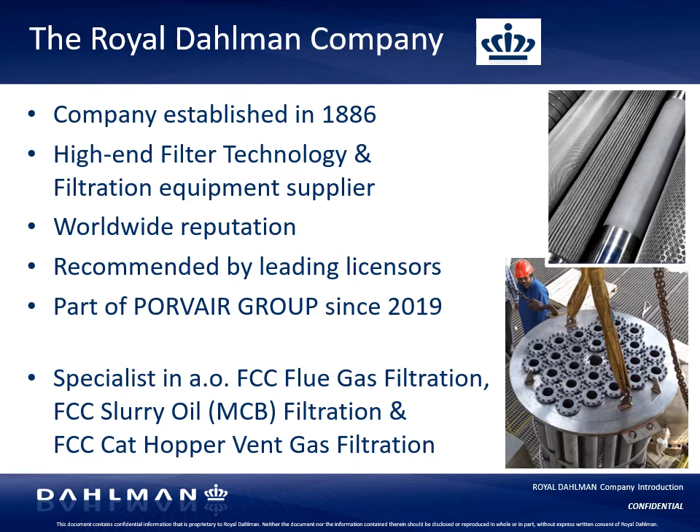This is great, because now in our FCC filtration systems we can implement our own in-house developed, tested and manufactured sintered metal filter media. In the refining industry, Dahlman has a serious track record in FCC filtration solutions, such as FCC cat hopper vent gas filtration, slurry oil filtration, and FCC flue gas filtration, the topic of this presentation today.

Of course, everyone is aware that our environment is important to all of us. Reduction of NOx, SOx and particulates in refineries has always been an important issue, but the regulations nowadays get more and more stringent. So many refiners worldwide need to revamp their FCC regenerator off-gas systems, and even new refineries need to implement the best available technology to seriously reduce their stack emissions.

So for the removal of catalyst fines from FCC flue gas, filtration can be a great solution in situations where conventional separation technology is not sufficient anymore to meet these stricter emission guidelines.

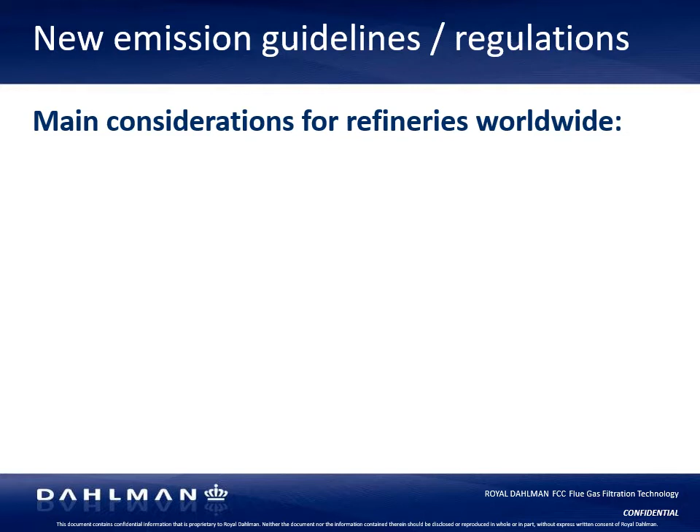When it comes to catalyst fine stack emissions in refineries, many countries require these to be lower than 50 milligrams per normal cube, or even lower, sometimes down to below 10 milligrams per normal cube. Therefore it's good to know which solutions are available and proven, what are the requirements they shall comply with, and which technology is safe and reliable to operate.

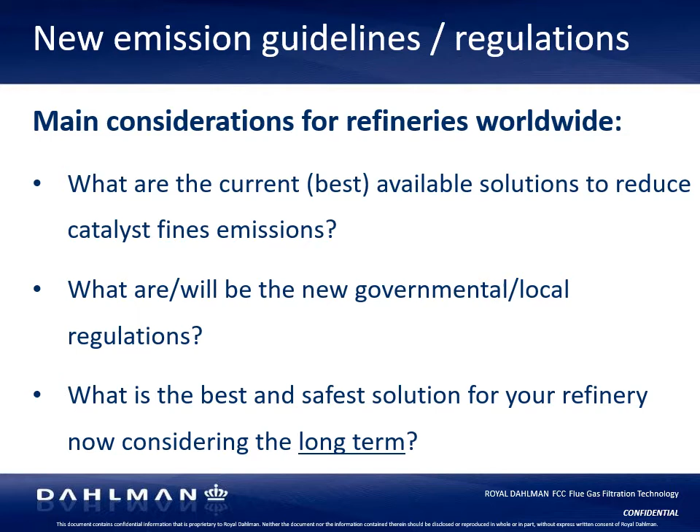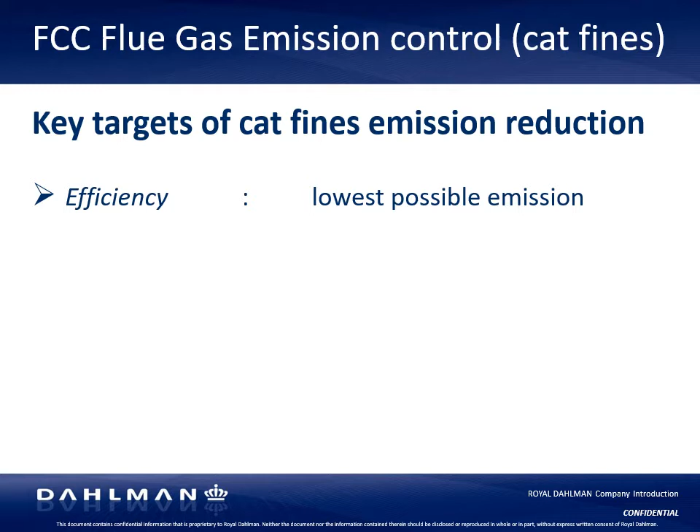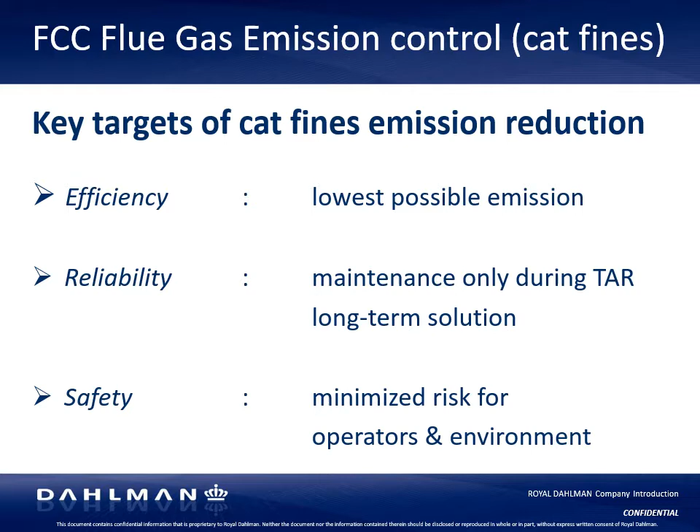So the key targets for cat fines emission reduction are efficiency. It makes sense to install the best available technology, because in the near future the environmental regulations will only get more stringent. Obviously you wish to install a reliable system with low maintenance, long operational lifetime, and finally it shall be safe for personnel and environment.

This picture shows a typical FCC flue gas process flow diagram, showing the reactor and the regenerator on the left side, and the possible separation and filtration solutions that can be installed to clean FCC flue gas before it finally leaves the stack. I will go through the different options that can be considered in order to remove catalyst fines from the FCC flue gas.

First, it is good to know that the typical concentration of cat fines in FCC flue gas is about 200 to 400 milligrams per normal cubic meters during normal operation. However, during upset conditions, this can increase up to 10 times higher than during normal operation. So it's very important to know, especially when designing separation and filtration equipment.

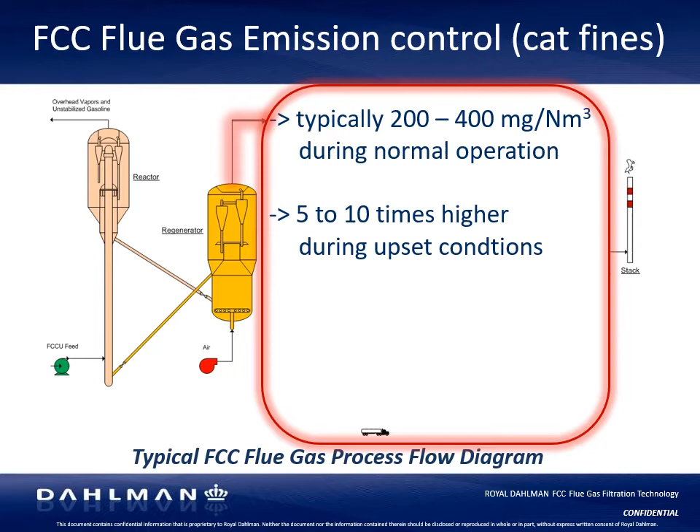One of the oldest separation technologies used in refineries to remove catalyst fines is the third stage separator, or TSS. Before the flue gas leaves the stack, many FCC plants have a flue gas expander or power recovery unit to recover energy from the reducing flue gas pressure. Typically, regenerators are designed with multi-stage cyclones to capture and return and drain catalyst back to the fluidized bed.

However, this flue gas still contains high contents of catalyst fines that can do harm to the expander. So a third separator installed upstream of this expander can protect the expander blades from erosion due to abrasive catalyst. The third separator contains cyclonic separation technology, so multiple cyclones, reducing the high amount of cat fines in the regenerator off gas significantly. In order to optimize the efficiency of the TSS, a certain underflow needs to be extracted at the bottom of the vessel.

So when 100% of the flue gas is coming into the TSS, 97% is leaving the TSS, going to the power recovery unit, and average 3% of the gas is going to the FSS, the fourth stage separator. The volumetric flow rate of the underflow gas is determined by means of the critical flow nozzle.

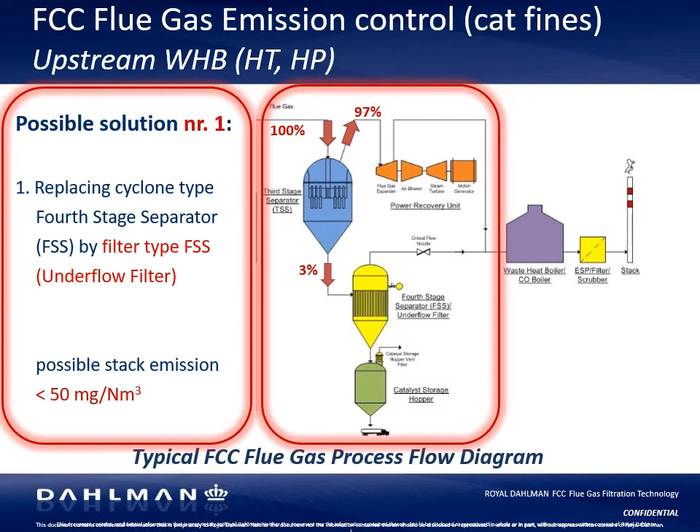The main problem is that the efficiency of a cyclone is rather low, and a lot of fines will end up in the flue gas again, resulting in high stack emissions. A possible solution for refineries already having a TSS system with a cyclonic type FSS is replacing the underflow cyclone with a fourth stage filter, because a filter has a much higher efficiency.

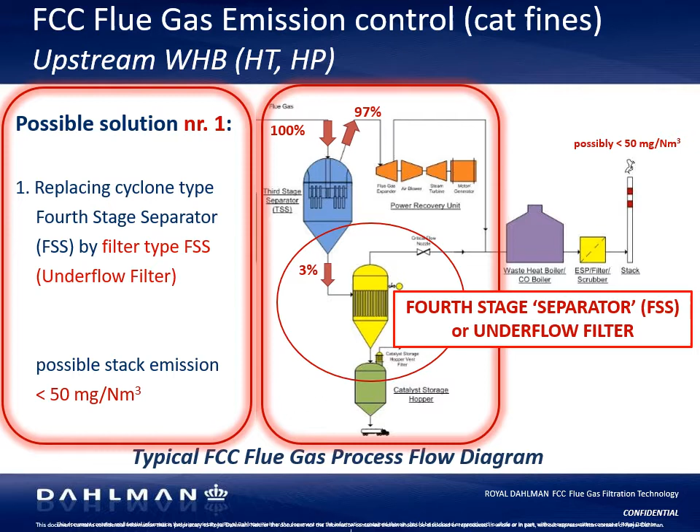The purpose of the fourth filter is to effectively remove most of the catalyst fines from the underflow gas, and in this way assist the third separator to reduce the overall stack emission.

In general, refineries having a TSS package with an FSS cyclone report fines emissions in the stack that are not lower than 60 milligrams per normal cubic meter, many actually much higher, and where a new FSS filter can reduce this to below 50 milligrams per normal cubic meter, which currently in many countries is still an acceptable level.

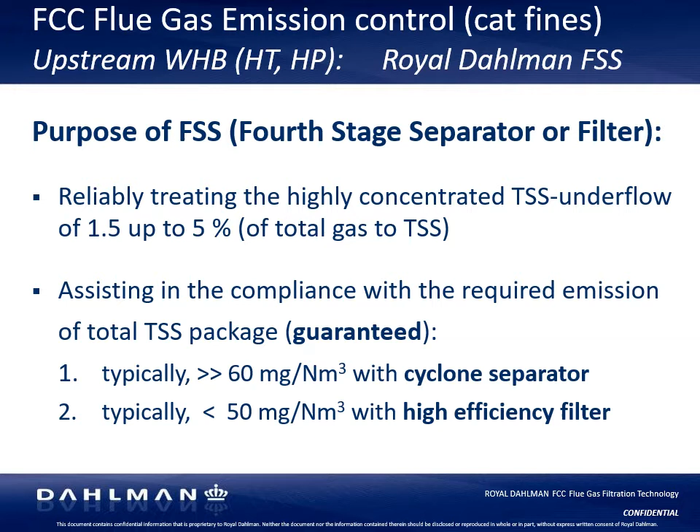Since the fourth separator filter is operated at a pressure of typically 2 to 3 bar G and at high temperatures up to 500 to 600 degrees C, there are of course some critical design criteria.

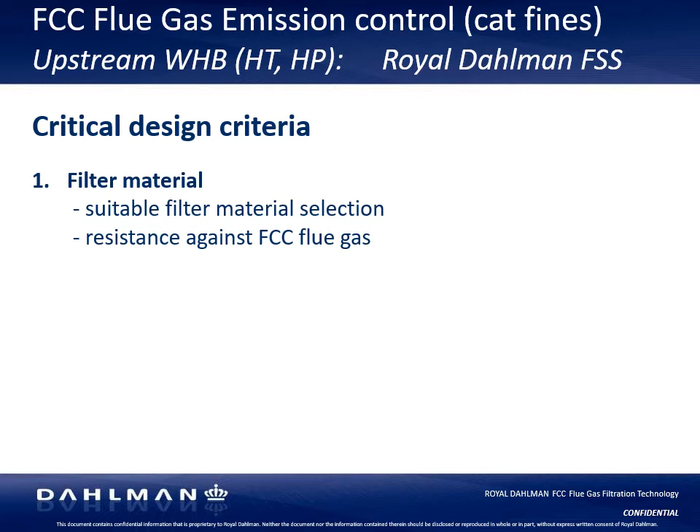First of all, the filter media shall be resistant against high temperature, and they shall be suitable to operate in the very corrosive, oxidative and dust-laden environment.

Secondly, the design of the filter is very important. Due to the high solids load, the filter elements shall be optimally protected against the abrasive characteristics of the catalyst.

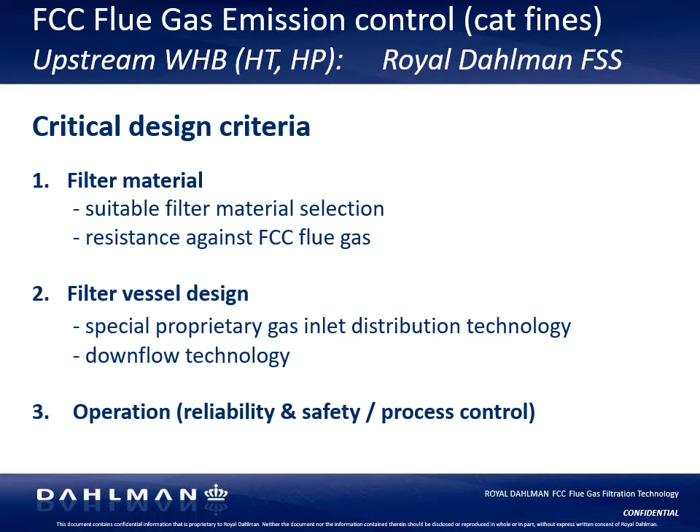Finally, the operation procedure and controls shall make sure that the filter can be operated without unplanned stops for at least one turnaround period.

Dahlman has supplied multiple fourth separator filter systems which are successfully in operation for a long time. One of the reasons for that is that we apply sintered metal fiber filter media in order to achieve surface filtration and to prevent clogging, so no penetration of particles inside the filter medium.

They also show perfect in-situ cleaning performance at low pressure drop. And although they are exposed to challenging process conditions, they have excellent lifetimes, even up to nearly 10 years.

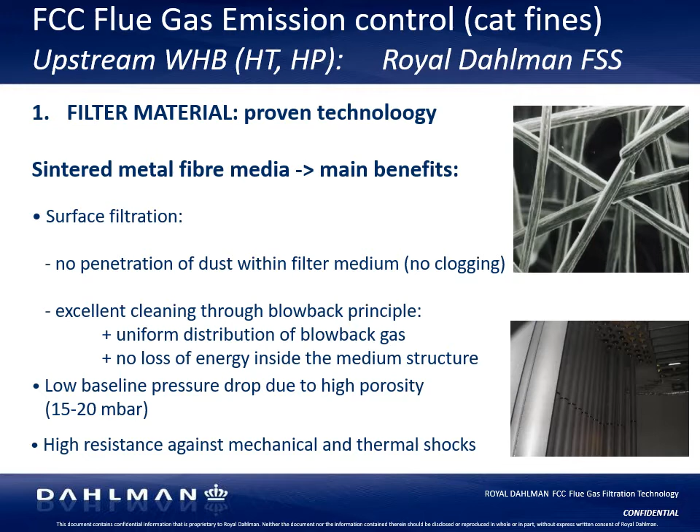Dahlman has developed a very successful inlet device that prevents the filter media from direct impact of the abrasive catalyst fines. Since the filter elements are automatically regenerated during operation, it is critical to achieve low velocities inside the filter housing to make sure that the fine catalyst particles fall down into the cone of the filter after cleaning.

Too high velocities, of course, will result in re-entrainment of fines back onto the filter elements, which will result in high differential pressure and in the end, plugging of the filter.

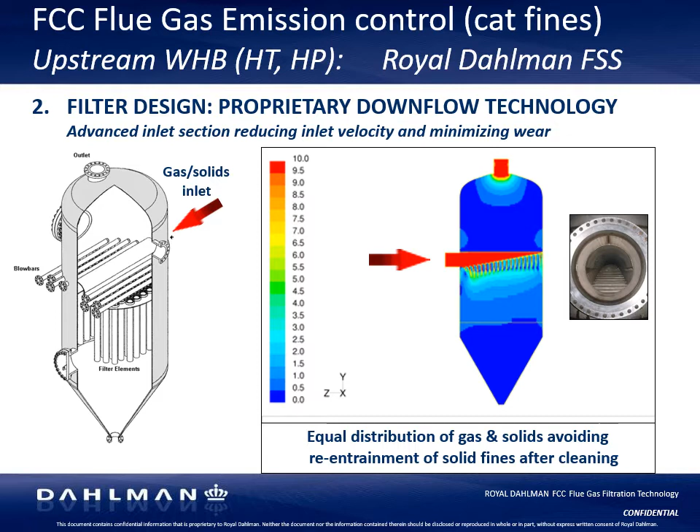Finally, as mentioned before, the filter shall be designed to function properly even during the worst case scenario, so during upset conditions. During startup and shutdown, the temperature control is also very important to prevent condensation, and the operation of the filter package as a part of the overall flue gas cleaning system shall be safe and reliable.

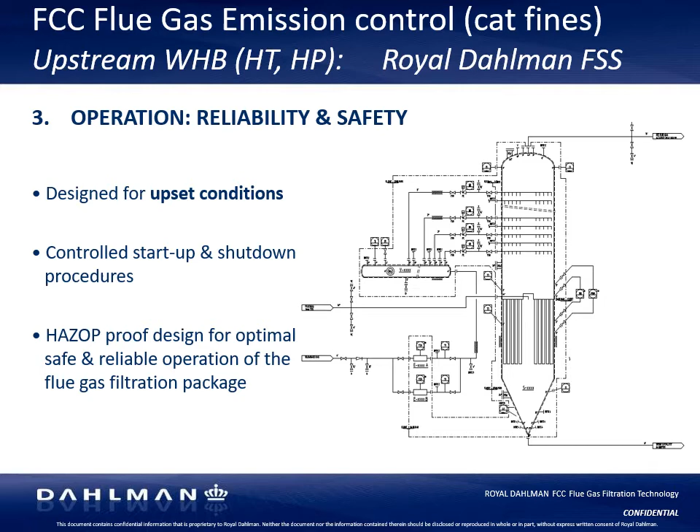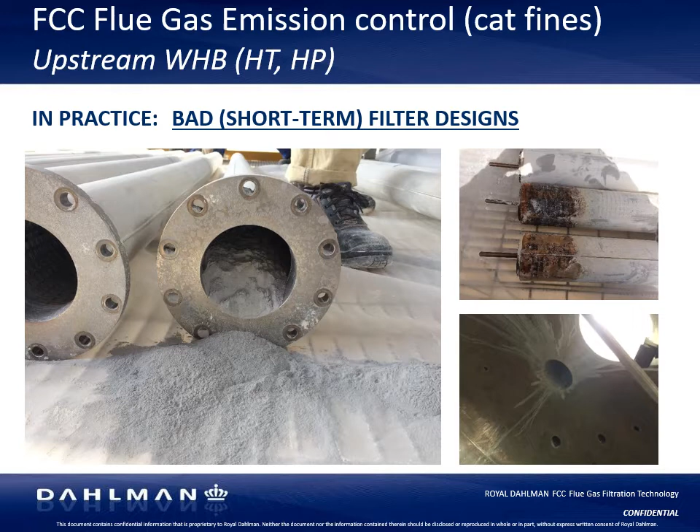However, when all critical design criteria are taken well into consideration, it is very well possible to operate the system very reliably and achieve lifetimes of the filter elements up to nearly 10 years.

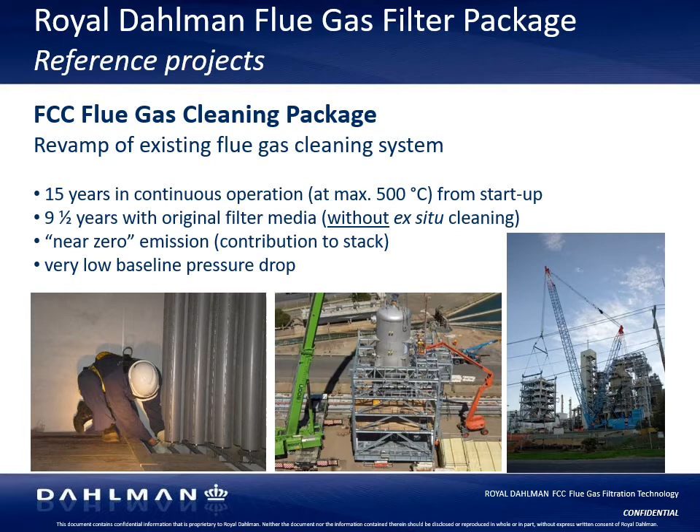Another possible solution that can be installed upstream of the waste heat boiler is a full flow filter that replaces the TSS and the fourth stage separator, so in fact it is handling 100% of the FCC flue gas. The filtration technology that can be used in this location is similar to the fourth stage separator, so typically sintered metal filter media, and obviously this will result also in a very high emission reduction.

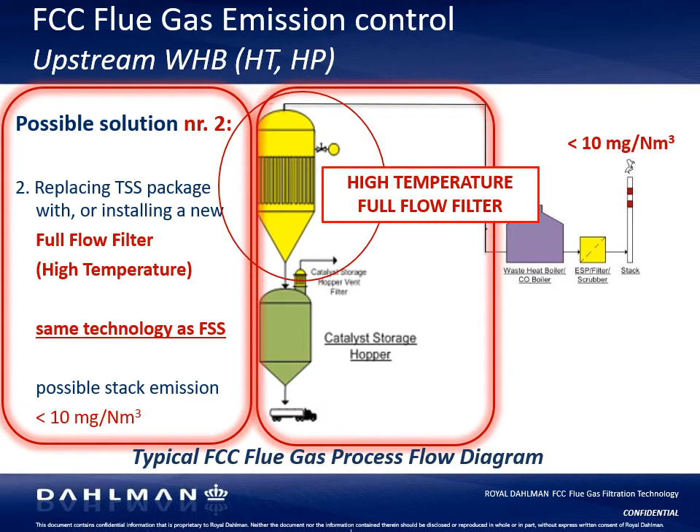The main issue here is that due to the high temperature, the high pressure and the high actual gas flow, this option is extremely expensive. And when it shall replace the existing equipment, often also the large plot space that is required is problematic. So yes, some high temperature full flow filters are in operation in the field currently, but really only in very small refineries.

Other flue gas cleaning solutions are installed downstream the waste heat boiler or the CO boiler, as you can see here on the right.

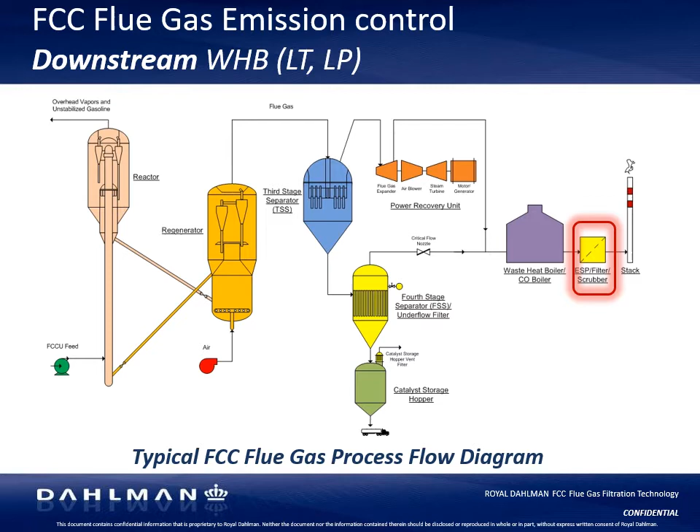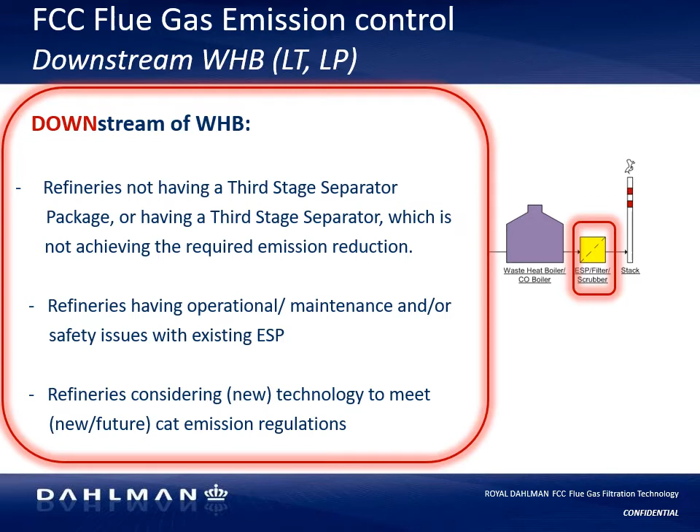These options are usually considered in refineries that do not have a TSS, or have a TSS that just cannot achieve the required emission level anymore. Some refineries also consider other technologies because they have safety issues, mostly with ESPs that operate at high current and high voltage, or they just need to comply with new, more stringent governmental regulations.

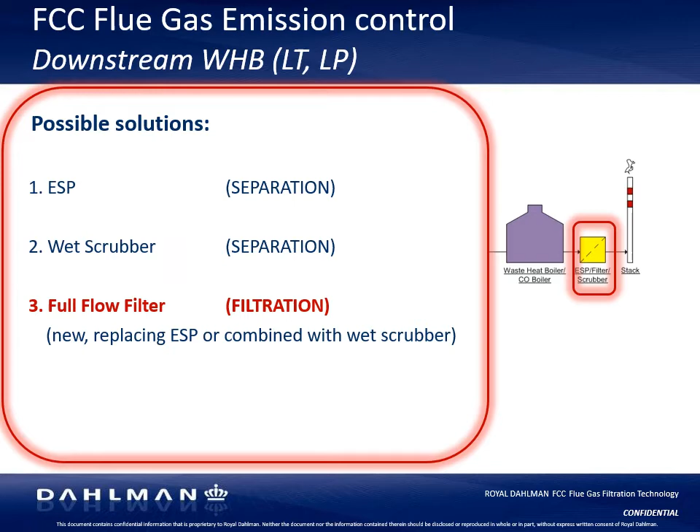In general, there are 3 technologies that can be installed at this location, downstream the waste heat boiler: the ESP, which uses separation technology to effectively remove catalyst fines; the wet scrubber, typically not installed for fines removal but for SOx reduction, however the water will catch fines too; and the full flow filter that can achieve a very high efficiency when it comes to solids reduction.

When comparing all these different technologies, there are some important differences that I wish to highlight. I won't go through them all. For instance, both the full flow filter options are very efficient, but there's a big difference in investment costs. The filter installed behind the boiler is much cheaper and also less risky due to the lower operating temperature and pressure.

Apart from that, the guaranteed emission of a full flow filter is the lowest of all. Even 10 milligrams per normal cube may be well below the required emission level, but for sure it is future-proof since emission regulations will only go down.

Another benefit of a filter compared to a separator like an ESP is that it is not sensitive to solid load fluctuations. And last but not least, ESPs may cause a safety issue.

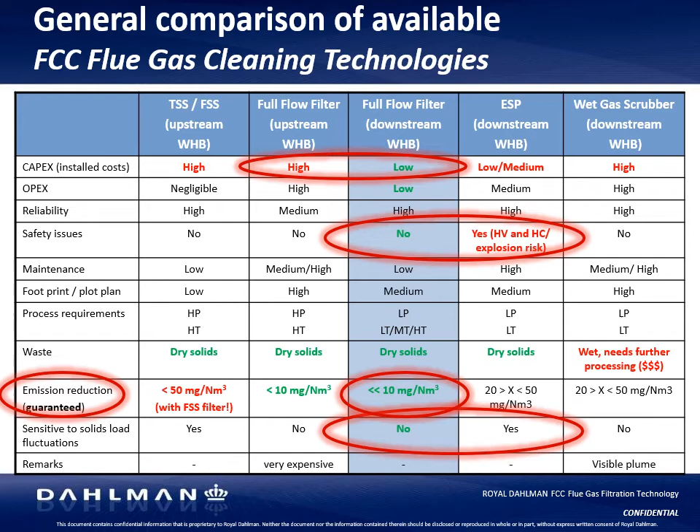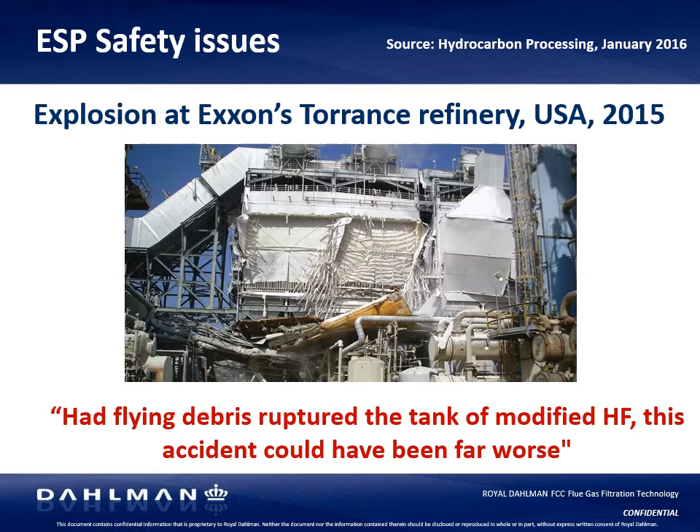Due to the benefits of the full flow filter installed behind the boiler, I will use a reference project installed in one of the European refineries to give more details. This refiner had an old boiler and an ESP that was bypassed for years due to malfunctioning, so there was actually a big yellow-orange plume coming out of the stack.

The new system should make sure that the emission is reduced to below 30 milligrams per normal cube for now, but also should be able to meet below 10 milligrams per normal cube to be prepared for the future, as I mentioned before, but without a lot of modifications to the system I wanted to install now.

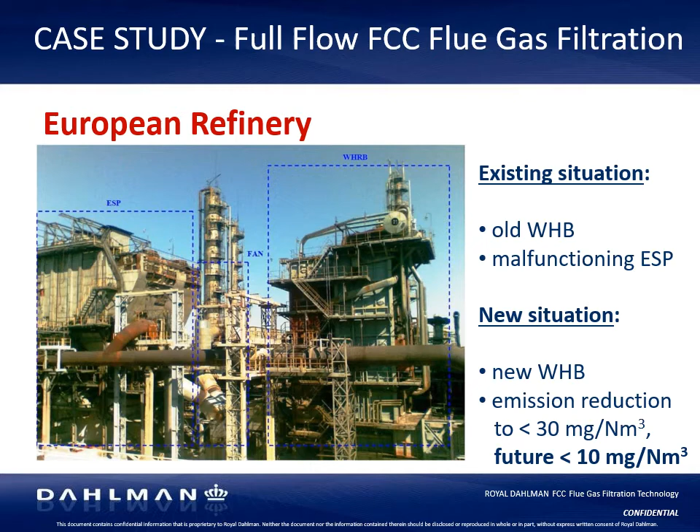For this customer, the choice was a new and better ESP or a full flow filter. There was no need for SOx reduction, so a wet scrubber was no option for them.

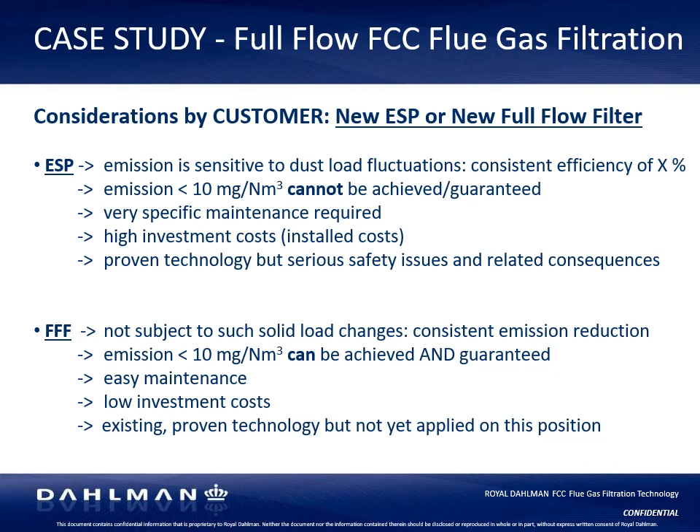This is actually a summary of the main considerations they made when comparing both technologies. I already mentioned some of them, but actually the installed costs of the ESP and the guaranteed efficiency of the filter were the key drivers for the refiner to install a full flow filter.

A filter system installed at this location shall at least comply with the following conditions. Of course, the filter media shall be suitable for operation in an FCC flue gas environment. The operation shall be well above the acid dew point at all times to prevent condensation issues, and an optimal inlet gas distribution system is required.

In this specific project, also the low guaranteed emission level was an important key driver for the customer to decide to install a filter.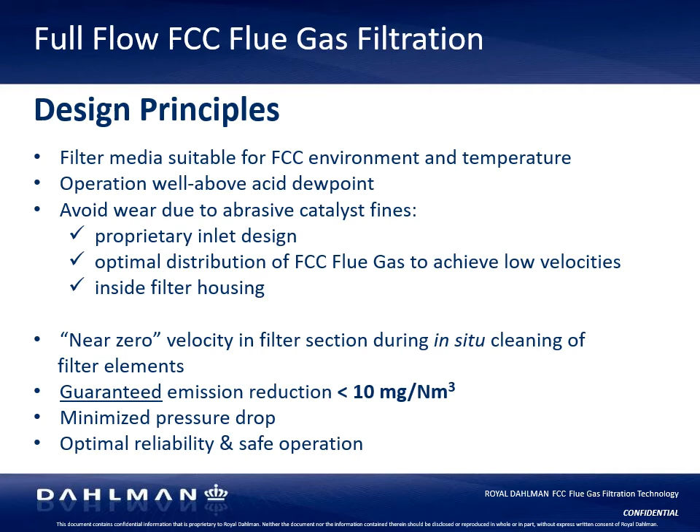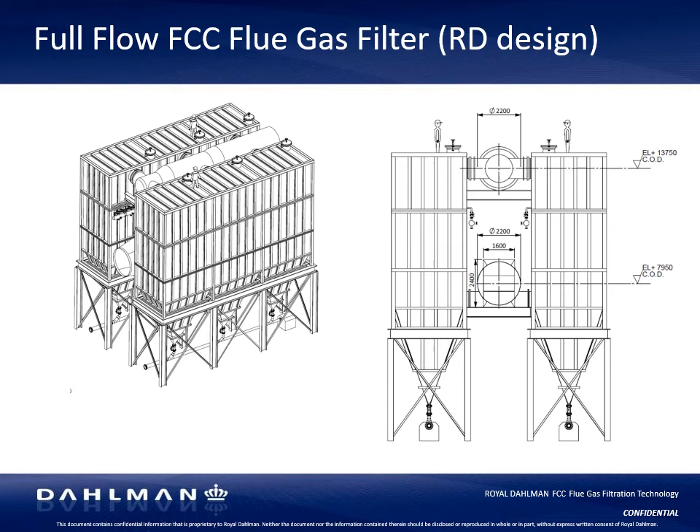Here you can see the general layout of the full flow filter system. Actually, it's split into two main parts, one on each side of the inlet and outlet ducts. The inlet duct is here, and the outlet duct is just above the inlet ducting to save space.

As you can see on the picture of the inlet header, it's a special inlet distribution device that has been developed specifically for this application to make sure that the catalyst fines are pre-separated and that the gas is equally distributed inside the filter compartments.

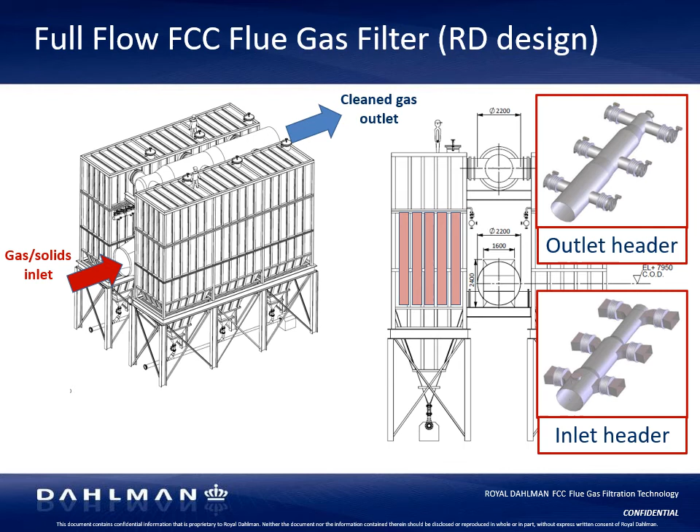Both compartments contain filter bags. They are fabricated of a unique filter material developed specifically for FCC flue gas filtration.

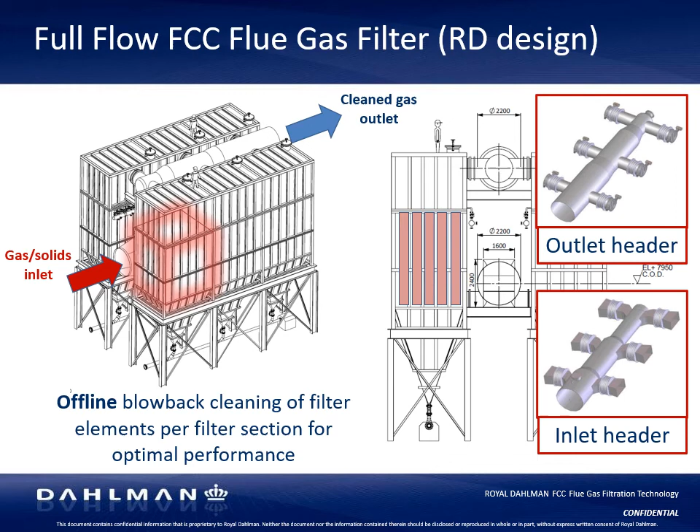One of the key features of this filter system is that individual sections can be offline cleaned. So the flow rate in one section can be blocked, while the other sections continue the filtration process. In this way, the very fine catalyst particles can optimally settle down in the bottom section of the filter after regeneration.

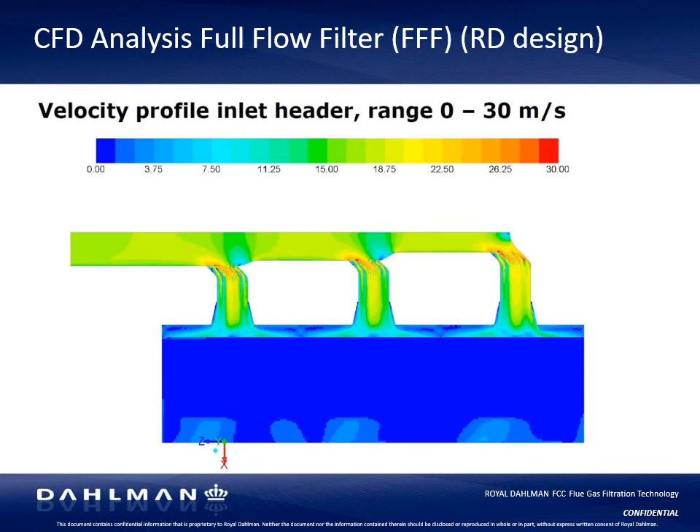As you can see on this CFD analysis, it clearly shows how the velocities in the filter housing are reduced to a very low value. The dark blue area is actually the area where the filter bags are installed, so they are optimally protected against the abrasive catalyst impact.

This specific first full flow FCC flue gas filter has been running for almost 7 years now, currently still reducing the catalyst emission level to 5 up to 7 milligrams per normal cube, which is actually an excellent achievement. During the first turnaround, the filter bags were replaced with new ones as a precaution.

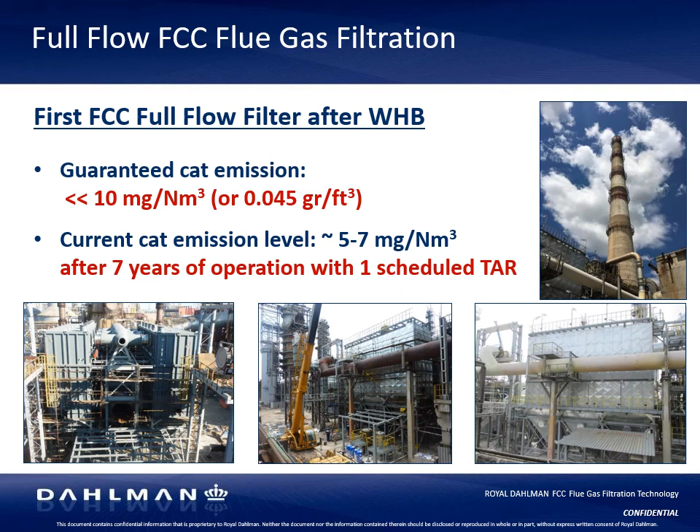The filter materials were subjected to a serious investigation. Apart from the fact that there was some dust remaining on the outer surface of the filter elements, there was no sign of wear, and the mechanical properties were very, very good. So based on the results, it could be easily concluded that the filter bags would have been able to run for at least 6 years before change-out.

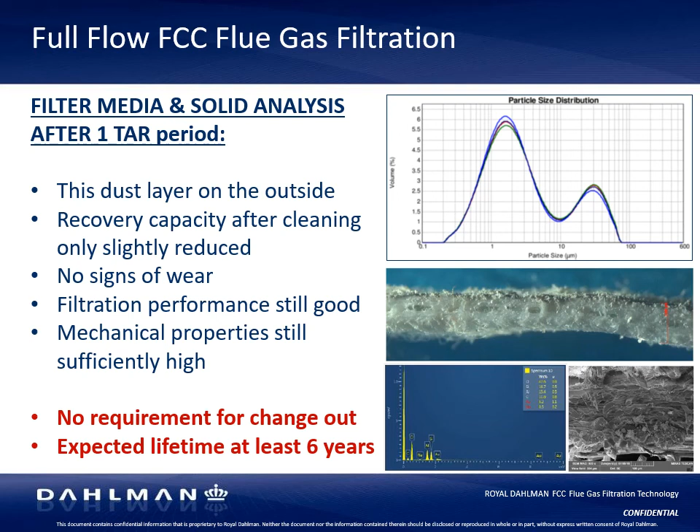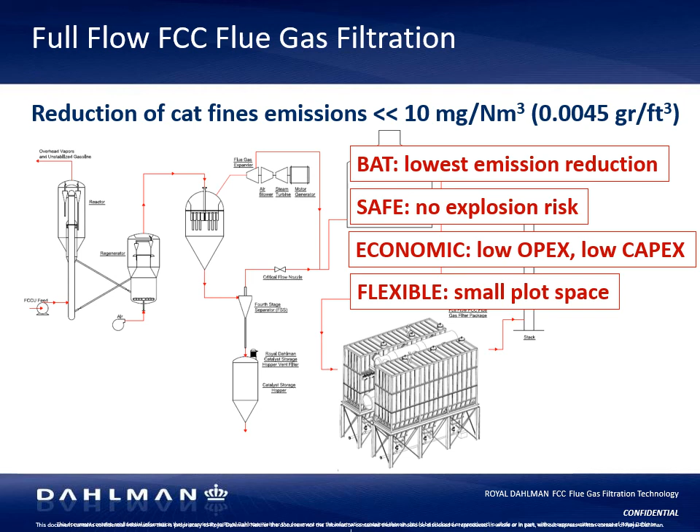So to summarize, the key features and benefits of the full flow filter: it's the best available technology when it comes to cat fines emission reduction. It is safe to operate. The installed costs are low compared to other technologies. And due to the flexibility of the bag house design, it can be easily adjusted to the available plot space.

To conclude this presentation, I hope I gave you a little more insight into the available flue gas cleaning solutions and the role that filtration can play in the reduction of catalyst fines stack emissions, upstream and downstream of the boiler.